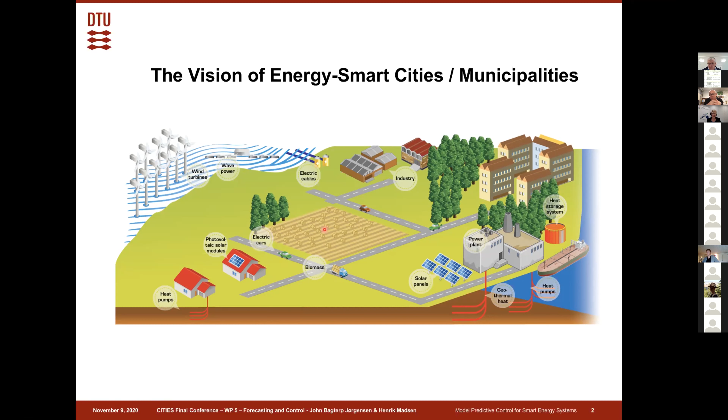So what we wanted to develop in Cities, and what I would say we achieved, is that we would like to combine forecasts in terms of wind power forecast, consumption forecasts, and then also models for the various energy units or entities participating in the energy system. We would then combine these into a planning and control tool that would coordinate all these entities such that they are used most efficiently and respect, let's say, temperature constraints and so on, and then essentially dispatch plans to energy units in real time.

To do that, we first had to develop a number of new mathematical and statistical modeling techniques, mostly based on stochastic differential equations. We also developed new optimization algorithms, and we implemented all this on modern computer technology. We were fortunate enough to work with a number of energy companies, such that we could also test this in many cases in real life.

One of the most spectacular case studies I was involved in was one where we combined economic MPC and unit commitment together with Ørsted at that time, where we essentially controlled the entire power system on the Faroe Islands for 3 months. What we will also show today is how these technologies can be used for integrated operation of electrical vehicles, batteries, solar panels, and buildings.

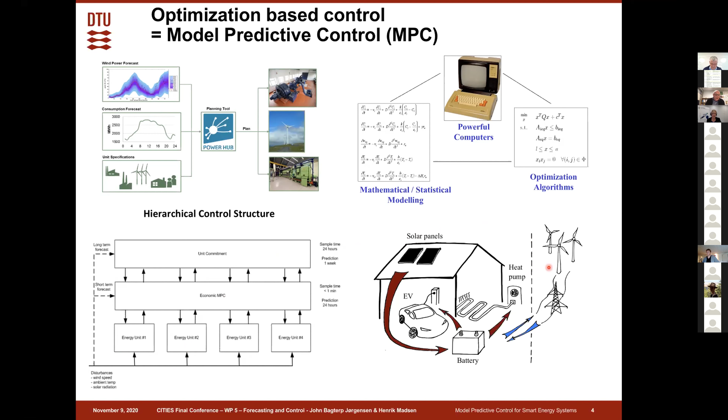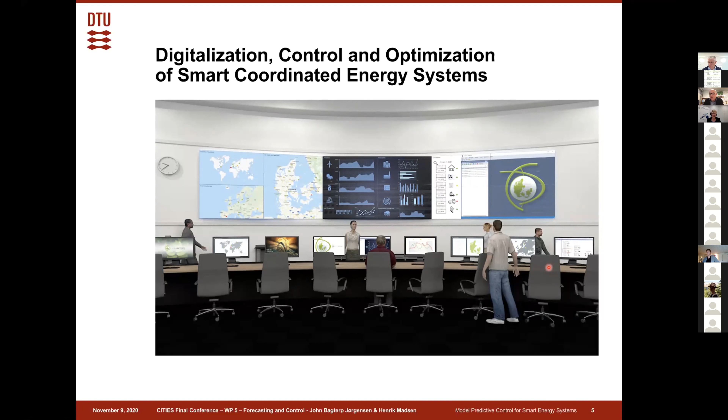So what is MPC? I will just give you a 2-slide introduction to this, where I try to explain the principles. And then we will show you what we actually did.

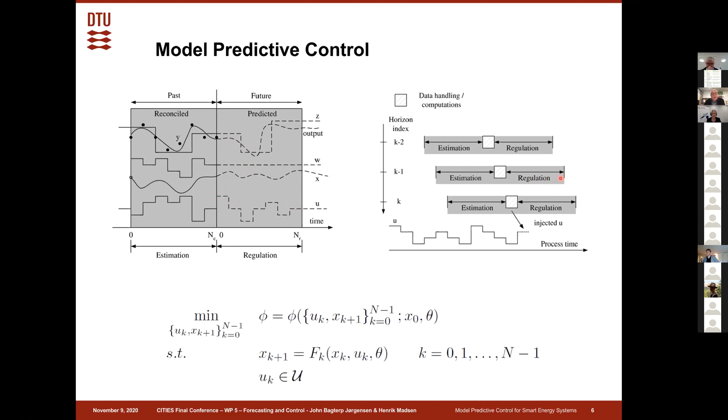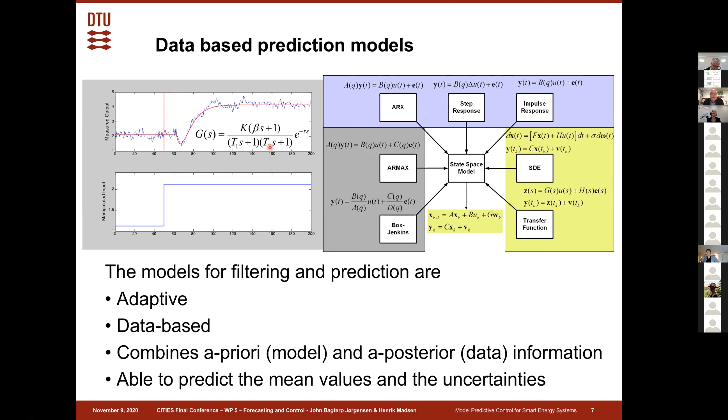There are a lot of details into how we actually solve these problems and formulate them, but we won't spend too much time on that today. What we will emphasize is that many of the models we've developed are based on data. Even where we don't have good a priori models, we can develop data-based models. We advocate using gray box models normally, but if you don't know much about your system, it can be entirely data-based, as shown in this diagram with a step response, where we capture the dynamics with a parameterization like this. So to sum up, our models are adaptive, data-based, combining a priori model knowledge and a posteriori data information, and we can predict both mean values and uncertainties, and develop model predictive control solutions around both types of models.

Essentially, what we did is take a wind power forecast, consumption forecasts, and any other forecast, then combine that with models of the system we want to control, and put that into what is called a power hub, implementing this model predictive control technique for all the energy producers and consumers in a grid.

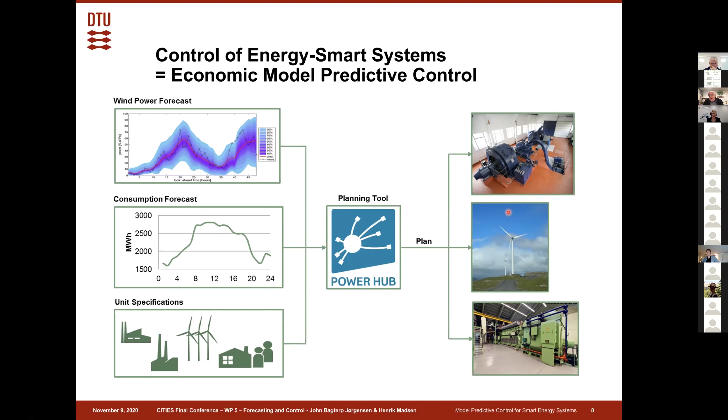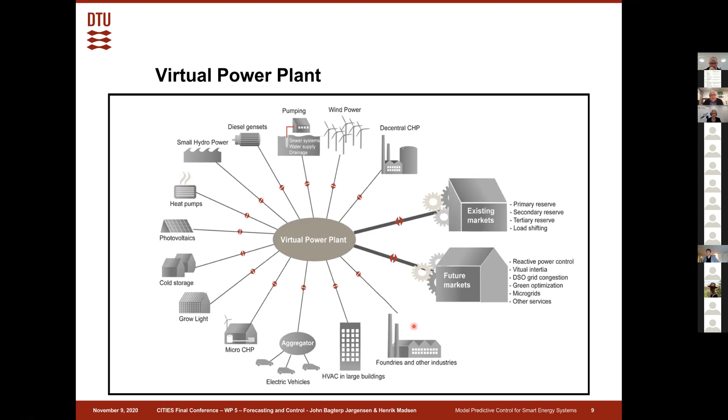It can be many different types, as we've tried to indicate here: entire decentralized CHP plants, wind power plants, pumping systems like sewer systems or other pumping applications, hydropower as was the case in the Faroe Islands, heat pumps, photovoltaic cells, cold houses, greenhouses, individual homes with local power production, aggregation of electrical vehicles, large commercial buildings, and other industries. We developed technology based on MPC that can coordinate all these types of energy consumers and producers.

The key idea is indicated here. Essentially, what we do is combine forecasts, typically simplified weather models, with a hierarchical level of model predictive controllers, where we have economic model predictive controllers that in this case control a number of wind turbines, each with a local MPC on. These are the type of model predictive control systems we've developed and tested on some case studies.

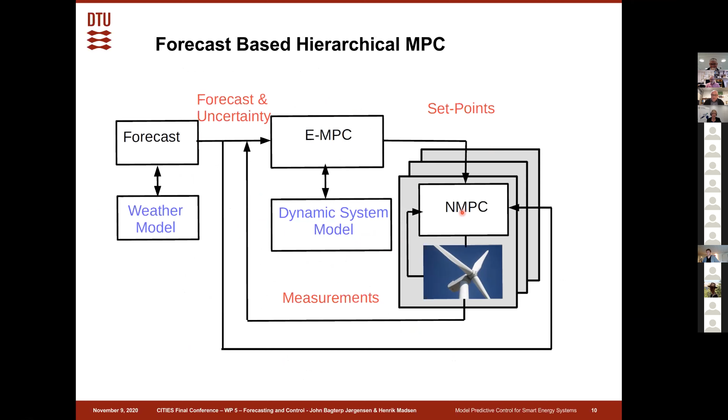Let me show the case study we'll go into more detail with. This is where we have abundant wind power in the grid, and then a local energy smart home with an electrical vehicle, a stationary battery, a heat pump, and photovoltaic cells on the rooftop.

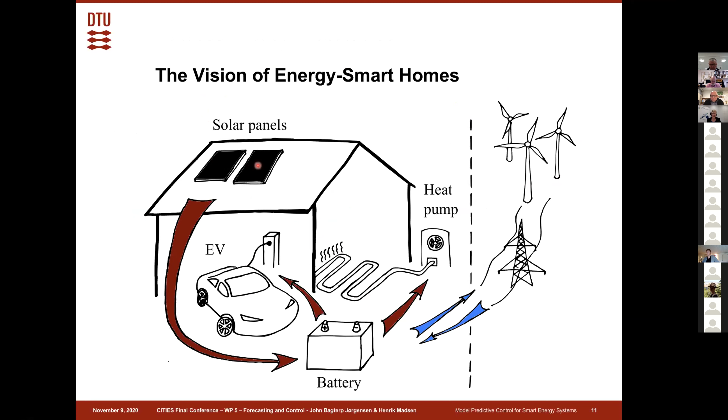If you look at this vision, it's actually very similar to the vision of a guy from California, Elon Musk. This is his picture of the same thing. He has the Tesla Powerwalls here, that's the stationary batteries, the electrical vehicle. You cannot see the heat pump, but it is out here. And then you also have solar roof tiles, so you can actually produce energy on this roof.

Using this vision, we developed a number of new technologies for MPC to be able to coordinate such a house, and also an ensemble of such houses in an entire neighborhood. We introduced concepts like multi-level soft constraints, and smart ways of taking the cost-to-go function into account, so we could keep track of the value of energy stored in a system like that.

We also developed rather simple models that proved adequate for the simulation, control, and optimization of such systems. And we developed very efficient computational algorithms to solve this with minimal computational resources and very, very fast in real time.

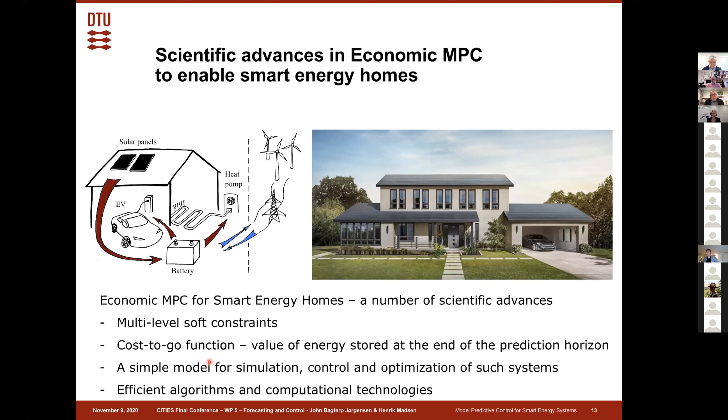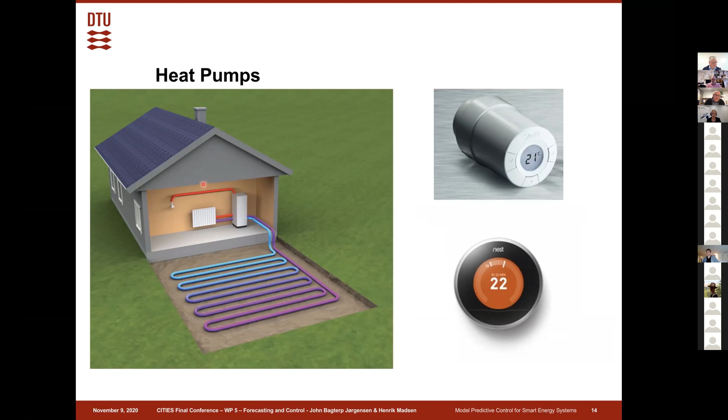So if we look at a house with a heat pump and a smart thermostat, it could look like this. We have the heat pump here, the radiator here, and then hot water for showering and so on here.

What I should also say before I show you the details: we developed applications of this based on embedded computers, where we used Raspberry Pi type computers, with the intention that this could be locally in the house, receiving set points from coordinators. But we also developed solutions in the cloud, where the local houses only had communication equipment, essentially, to actuate the signals coming from the cloud, from a central computer.

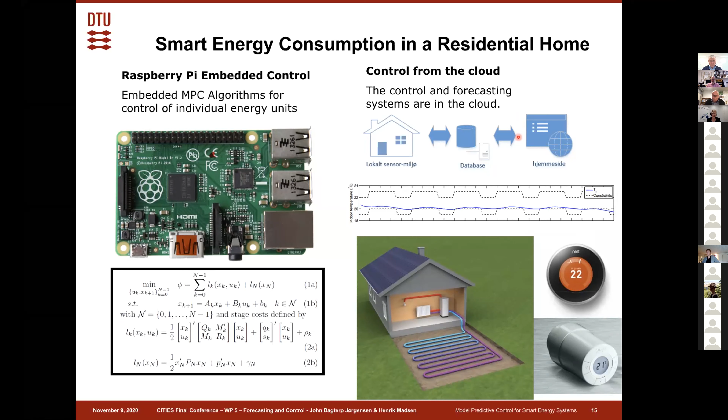So how does it work? It is described here. We have time varying set points, a lower limit and an upper limit on the temperature. The green one is the electricity price, time varying, and down here you can see the outdoor temperature and the solar radiation.

What the MPC then does is essentially control the heat pump, that's the red one here. You can see it turns on when the power is cheap, in order to keep the temperature in the house within the upper and lower limit in a cost-efficient manner. So that's the basic functionality of the economic model predictive control we developed for these energy systems.

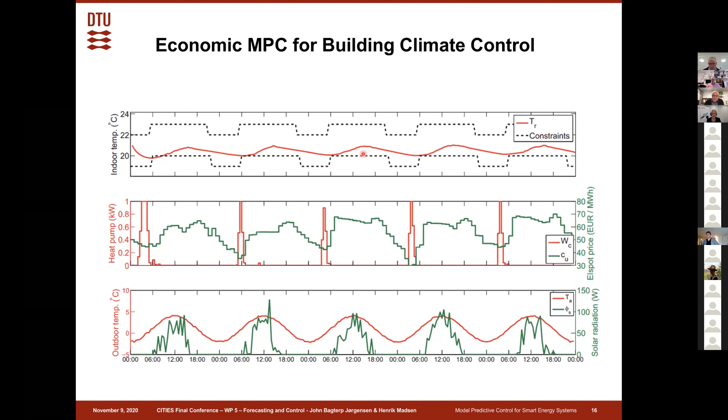We then extended it such that we did not only have a heat pump, but also an electrical vehicle with a battery and a driving pattern, and a stationary battery, similar to the vision of the Elon Musk house. You can see the economic MPC for an individual house like that can buy and sell electricity when it's cheap, making sure we have the indoor comfort we desire, and sufficient charging of our electrical vehicle when needed, again in a cost-efficient manner.

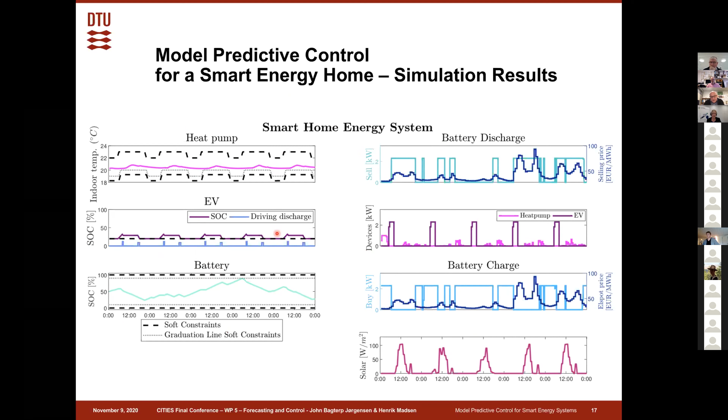We then extended this to not only one smart house like this, but an entire neighborhood. The idea was the same. We demonstrated that we were actually able to manage the heating and the electrical storage in the batteries in a cost-efficient manner, while still providing for all the needs of the end users.

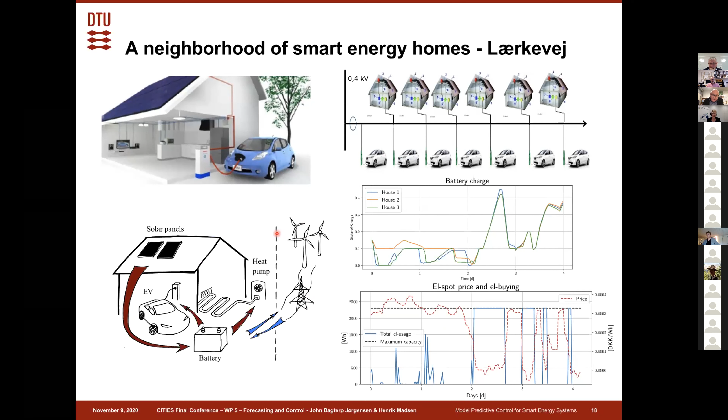So essentially, this was what we did until, let's say, last year. And then I want to show you a quite recent result that we are very proud of. It's really a result by Christian Thilker, a PhD student with Henrik Madsen, and I'm a co-supervisor. We took this house here that we wanted to model.

The real novelty provided by Christian Thilker was that he did not only model the house itself, he also came up with a simplified model of the weather process - the state variables of the immediate surroundings of this house - combined with meteorological forecasts, such that he got a combined SDE, stochastic differential equation model, for the house and the local weather process.

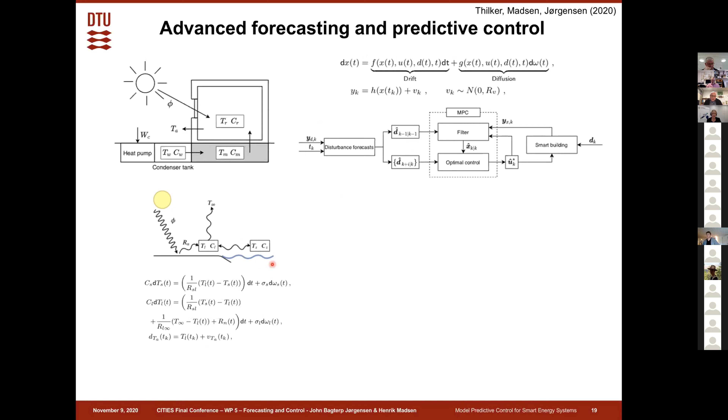He put that into an economic model predictive control, where he clearly distinguished between the disturbance forecast provided by this model - so that could be his model or another external provider - and then the MPC.

He ran that for several cases: one where he heated the house with only electrical heaters, one where he heated it with the heat pump, one with both heat pump and electrical heaters, and one where he had heat pump, electrical heaters, and electrical coolers.

The really nice result was that he showed that with his advanced forecasts, as you can see here, he could provide almost as good behavior as if we'd had the utopian perfect forecast.

What I think is rather important is that with this setup, he demonstrated that the comfort in the case when we combine the electrical heaters and the radiators, and maybe even coolers, can be much improved compared to only having heat pumps, for instance, and the electricity cost can be brought down compared to only having radiators.

So in this way, with this setup, I think this is the way forward to have both comfort and cheap, efficient use of power.

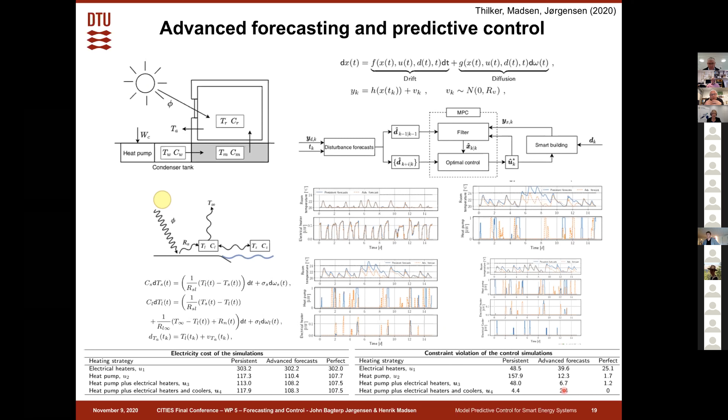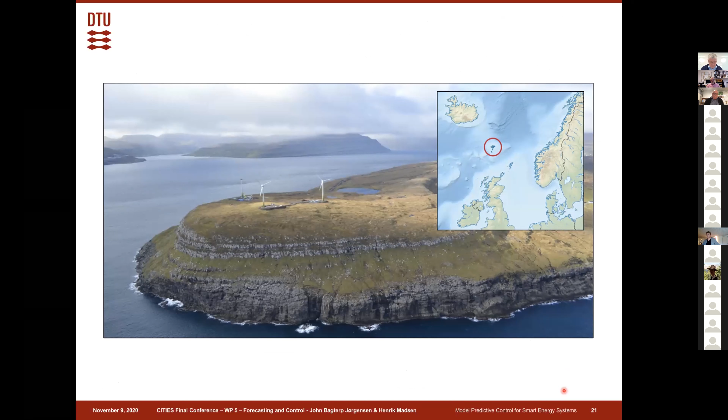We also did that for cooling houses. In the interest of time, I'll just move on and say it was implemented on the Faroe Islands, as part of one of the PhDs that participated in this - actually an industrial PhD. We ran these principles for the entire Faroe Island power system for 3 months, together with Dong Energy at that time, today Ørsted, and a local Faroe Island power company.

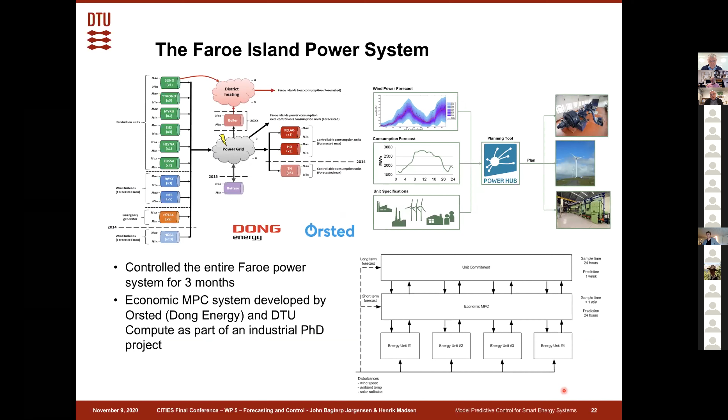All this was only possible because we had a number of inventions in algorithms. One of these is from this paper, where you can essentially see that by making novel algorithms for this entire power system, we were more than an order of magnitude faster than off-the-shelf standard algorithms like CPLEX, MOSEK, or Gurobi for solving the large optimization problems that were needed there.

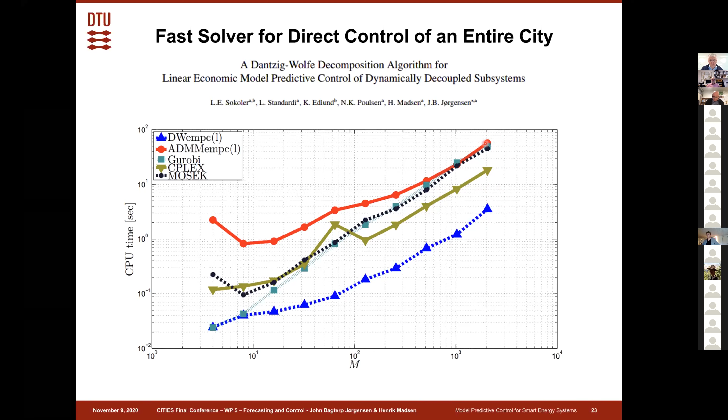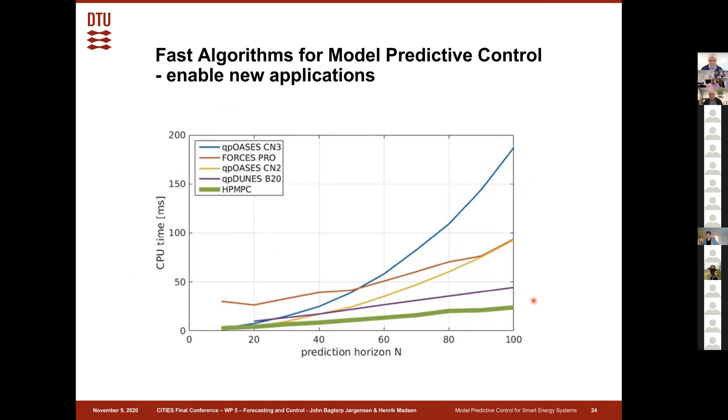So essentially what we are using this for in the next step is that we are then combining this with something that we did in parallel, not directly in CITIES, some of it actually in CITIES, where we are using the power-to-X concept, where we have a number of CO2 emitting industries like cement plants, steel plants, and some power plants burning waste, for instance.

We have a lot of renewable energy and maybe even hydro. And then the central part in this will be electrolysis of water as a way to store electrical energy, but also a way to produce new chemicals like methanol, methane, and ammonia.

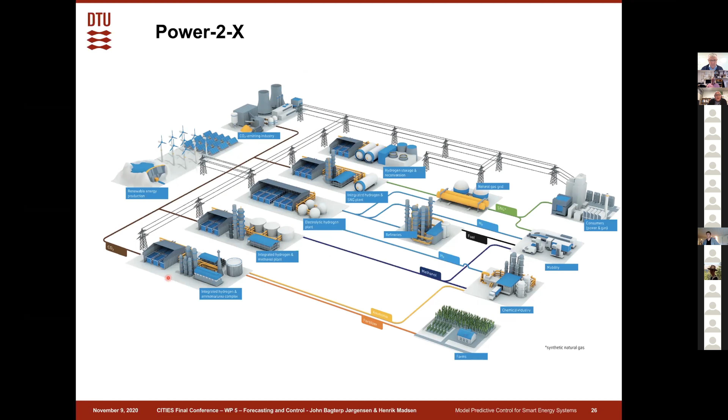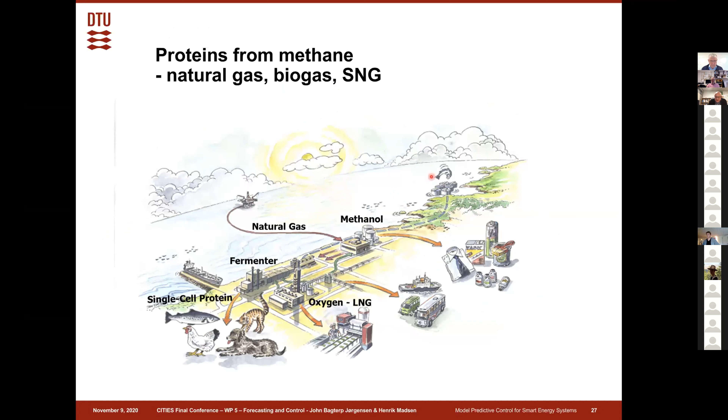Parallel with CITIES, we ran a project with a small startup company in Denmark at that time. Today there are 50 people. They could essentially convert natural gas to single cell protein that could be used to feed animals, including salmon in farms like that. And then you can say, oh, why is this related to CITIES? Well, you will see in a moment.

And just to indicate what is possible by collaborating with DTU, we came from the concept, I would say, in these 7-8 years to a factory like this built in Russia. And again, based on the model predictive control technology, this was possible. With this company, we actually filed a patent 1 or 2 years ago. They got, based partly on this patent, 100 million Danish crowns in capital from investors.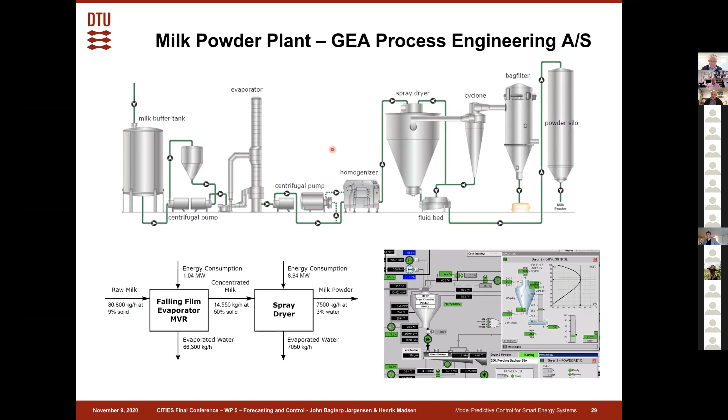as part of CITIES, we also had meetings with some very visionary people from Ringkøbing-Skjern that said, okay, how can we use all the wind power production that is in our municipality, including the power from the new offshore wind parks that will be built? And how can we use that locally with the resources that we have in this municipality? It's the largest municipality in Denmark, but not so many people live in it, so it's not very densely populated. So it's an agricultural area.

Well, they already had a dairy plant where they have a spray dryer plant. They have a lot of cows. They have a lot of biomass resources like this. They have an enormous amount of wind turbines and solar capacity and visionary minds, like you can see here.

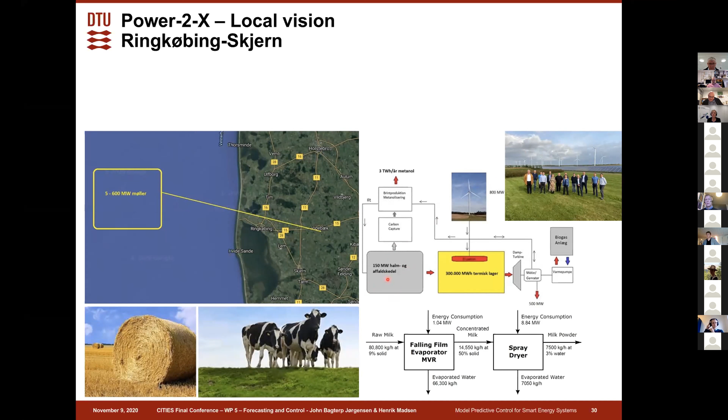And one of the ideas that was then proposed is to build a huge thermal storage for this, such that they can run all the renewable energy at full capacity at all times, combine that with boilers using straw, and carbon capture and electrolysis, such that they essentially also produce the feedstocks for a salmon plant like this. So this is a salmon plant in Hvide Sande.

So the salmon you pick up in the supermarket are probably grown here, and also for the pigs. And for that, they would then build the single cell protein factory that I just showed you. And all of these then need to be coordinated, and model predictive control technology is what is going to be used here.

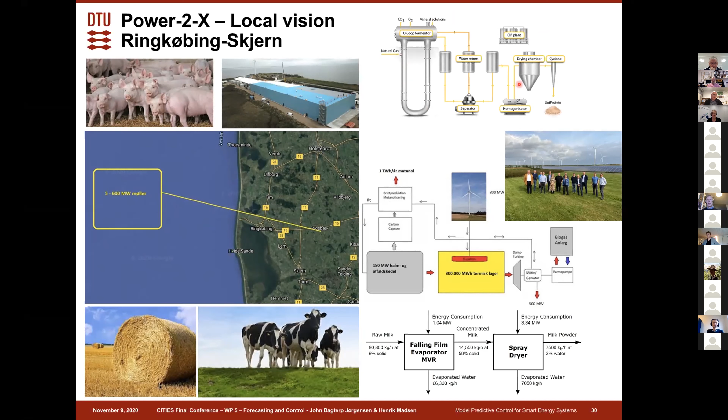John, can I ask you to sum up very shortly? Yes. Thank you.

So essentially what we have done is that we have developed a new MPC technology based on stochastic differential equations, new algorithms that could integrate forecasting and control. And this has been applied in a number of large industrial processes like cement, food, single cell protein, and also in energy processes like the energy system with Ørsted, wind turbines with Vestas, and refrigeration systems with Danfoss.

MPC is a mature technology. It's ready to be used, and you're welcome to contact me or Henrik if you would like to hear how you could participate in this or how you could use our MPC technology.